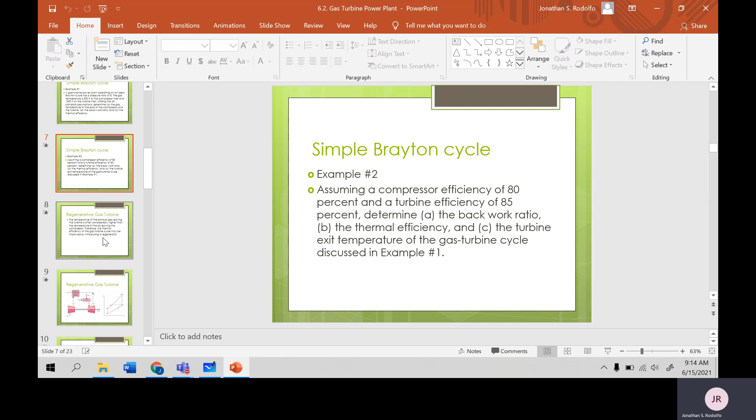Okay, so next is, okay, so let's use the slideshow. Where is it? Why is it missing? Oops, the pen is missing. Okay, let's try again. Why won't it work? Let's try to find the pen. Why is the pen not there? Wala.

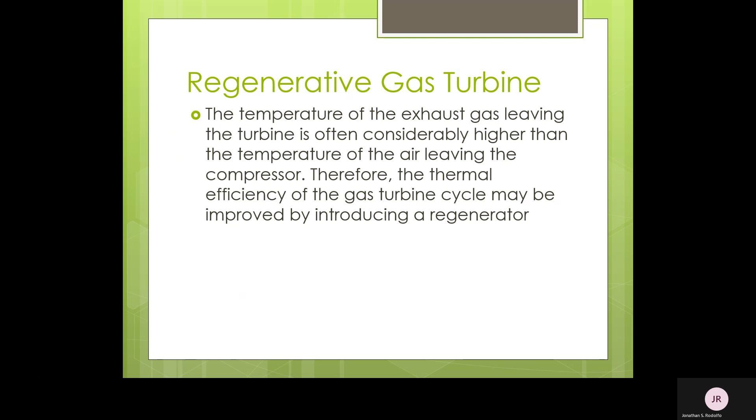Okay, let's go back. This is not the right one. So the first one, okay, this one. So, if we compare the temperature of state 4 to state 2, we observe that the temperature of state 4 is greater than state 2.

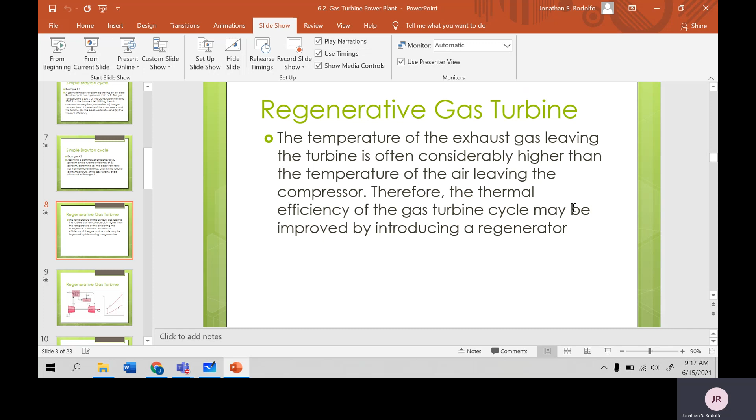Now, the energy leaving the turbine can be extracted to preheat the temperature of the air leaving the compressor. So from that, the thermal efficiency can be improved by using or introducing a regenerator.

Okay, check natin dito. So this is what I said a while ago, that the temperature of state 4 is greater than state 2. So we can use the energy of state 4, since it's greater than the energy of state 2, to be extracted to heat further state 2.

So, as we can see, from state 2 it increases to Tx, while state 4 decreases to Y. But take note that Y is still higher than state 2.

The temperature of state 2 will be equal to state Y if the effectiveness of the regenerator is 100%. So if the regenerator effectiveness is 100%, then 2 and y are equal, and then x and 4 will also be equal.

So from that, the thermal efficiency of the cycle increases because the heat input in the combustor decreases. So our heat input before is from 2 to 3, but now it's from x to 3. Same with our QR, before it's from 4 to 1, but now it's y to 1, so it decreases. Okay, let's try to solve.

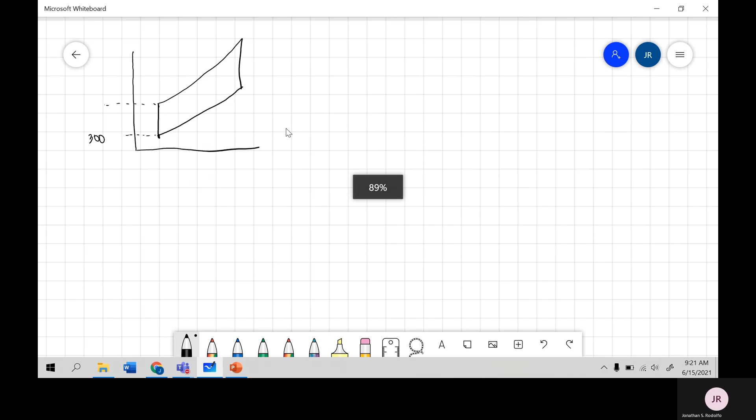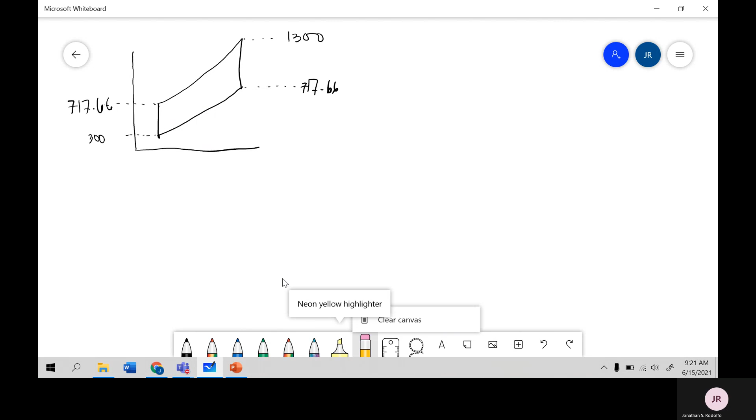This is 717.66, then this is 1,300, and then this is T4. Sorry, wrong, this should be 717.66, and this, let's delete. Ayan, 543.43.

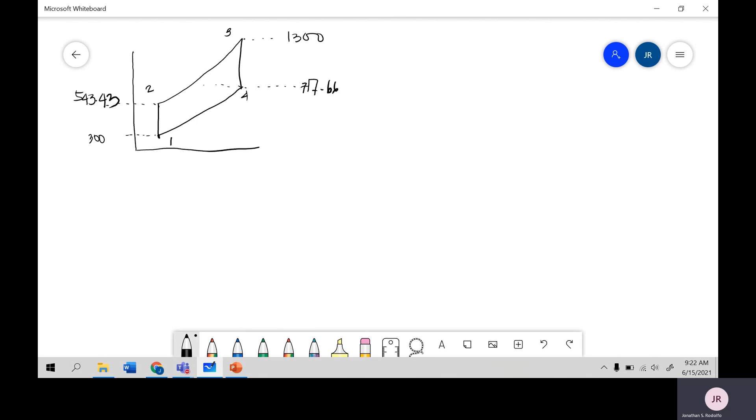Okay, let's write the states: this is 1, 2, 3, and then 4. Since the regenerator is 100%, then x and 4 are equal, so this would be x. Then 2 and y are also equal.

So, the thermal efficiency is equal to H3 minus Hx, all over H... QA. Bakit yan?

Ano nangyayari? So what should we use instead? Work of the turbine, work net, okay? Work net, since it's ideal and we have no isentropic efficiencies, so the net work would be ideal. Over QA, in terms of enthalpies this is equal to H3 minus H4, minus H2 minus H1.

Divided by... Assuming constant specific heats, cold air standard assumption, so in terms of temperature that is T3 minus T4, minus the compressor, T2 minus T1. Divided by QA, which is T3 minus Tx. Okay, so that is equal to T3, given.

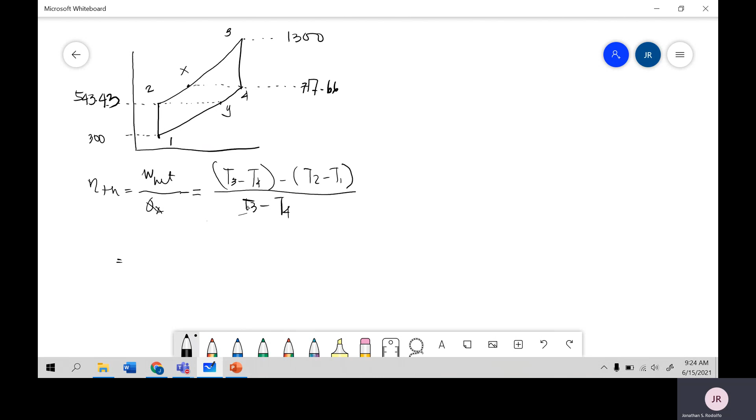This should be QA, T3 less Tx. Take note again, Tx is equal to T4, and Y is equal to T2. So maybe we can now change this to T4. Okay, we can simplify it, right? T3 less T4, yes. Maybe we can simplify it as ito is equal to 1 less T2 less T1 over T3 less T4.

So the thermal efficiency using cold air standard assumptions would be equal to 1 less T2, 543.43 less 300, over 1300 less 717.66. Okay, so it becomes 58.18%, so this is in terms of cold air assumptions.

And then using air standard assumptions, we change the thermal efficiency into H3 less H4, less H2 less H1 divided by H3 less Hx. But since the temperature of state X and state 4 are equal, we can now change this into H4. Take note class that the enthalpy of air is temperature dependent only. Unlike for steam or water, the enthalpy depends on pressure and temperature, but for air, it depends on temperature only. No matter how high or low the pressure is, it doesn't affect it.

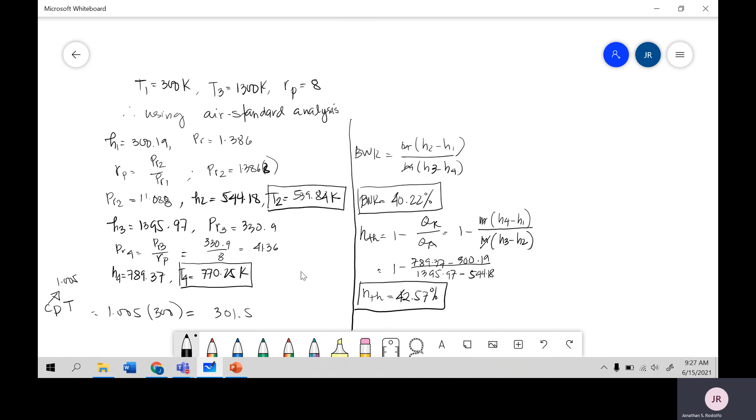So in terms of enthalpies, what are our enthalpies? Using cold air standard, let's go back. I think that is problem number 2, or solution number 2, maybe, or maybe this one, let's check. Oh yes, air standard analysis. So here, H2 is equal to, where is H2, 544.18. H4 is equal to 789.37. Okay, let's not get 1 and 3 again, we already memorized that. Alright, so go back.

Okay, so here, H3 is 1395.97 less H4 is 789.37, minus H2 is 544.18 less H1, 300.19. Okay, sorry, we can simplify this, so this is equal to 1 less H2 less H1 over H3 less H4, to make it simple.

1 less H2, this is 544.18 minus 300.19, all over 1395.97 minus 789.37. So the thermal efficiency using air standard assumption is, okay, that is 59.78%. So that's using air standard analysis.

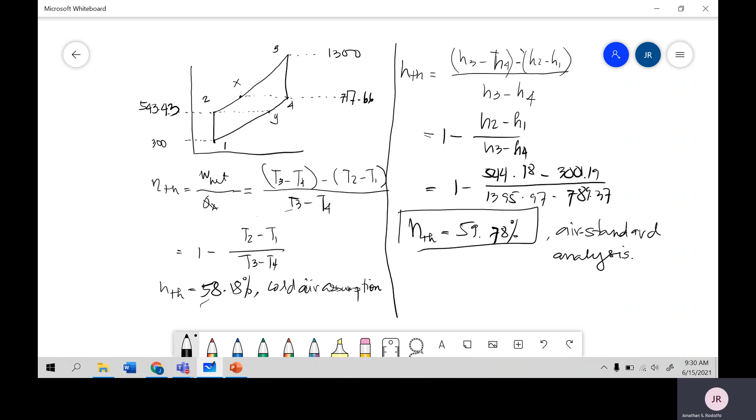Okay, next. So how about if the regenerator effectiveness is, let's say, regenerator that is equal to 80%?

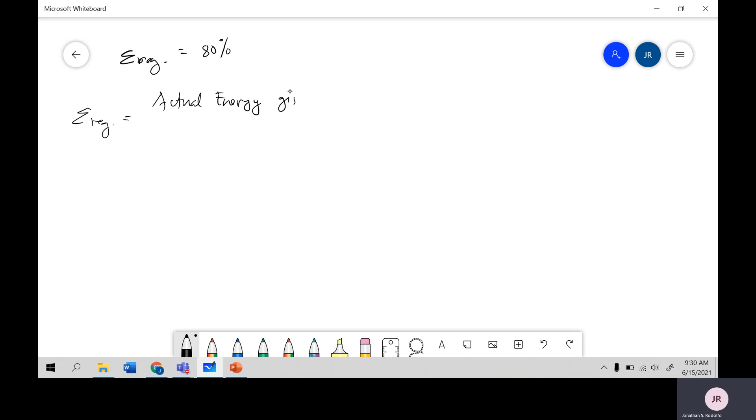Okay, so the formula for the regenerator effectiveness, that is equal to the actual energy given or extracted, divided by the maximum energy that could be given.

Okay, so going back to the figure, so the maximum energy, wait, the energy, actual is from 2 to x, then the maximum is 2 to 4, or it could also be 4 to, this. The actual energy extracted by state 2 is equal to Hx less H2, then the maximum is equal to H4 less H2. So how do we get this from the TS diagram?

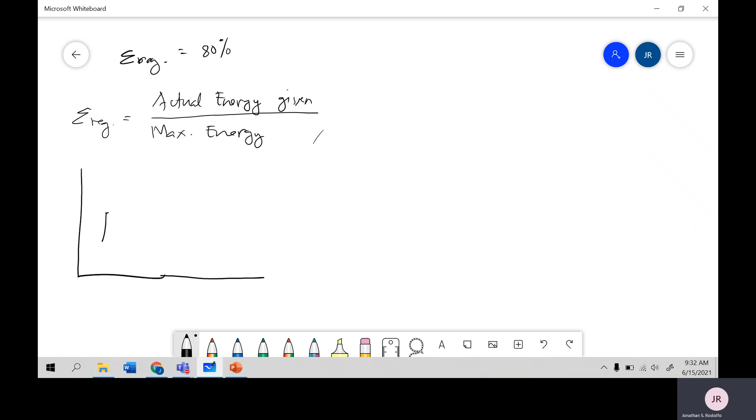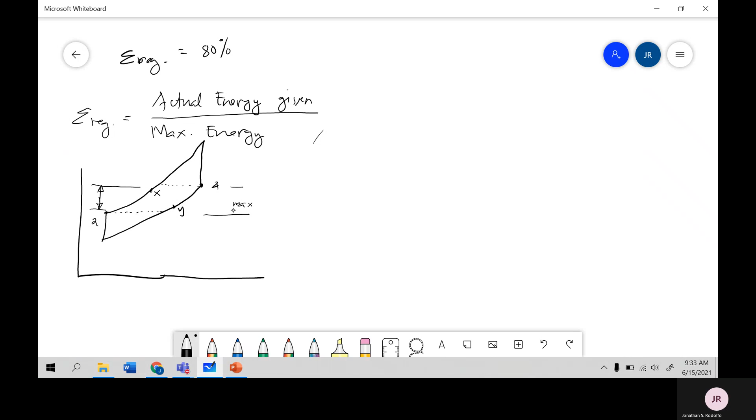This is y, no? So if you notice, y didn't reach here. That will happen when the effectiveness of the regenerator is not equal to 100%. Then our 2 is a bit lower, that's x, okay, so here is x. So the actual energy, this is the actual, yan. Then the maximum is this. So therefore, in terms of enthalpy, the regenerator effectiveness is equal to Hx less H2, divided by H4 less H2.

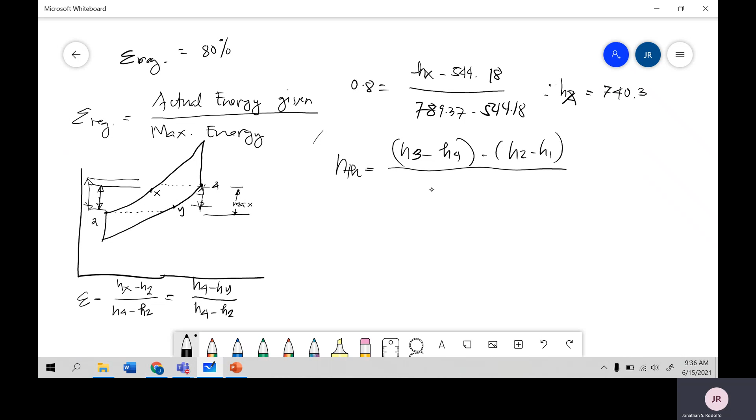So we can now solve for the thermal efficiency. That is equal to H turbine 3 less H4, minus H2 less H1, which is the work of turbine minus work of compressor. The heat added is H3 less HX now. Since we are given 3, 4, 2, then X is the enthalpy we already found. So we can now solve for the thermal efficiency.

This is equal to 55.30% for the thermal efficiency, okay?

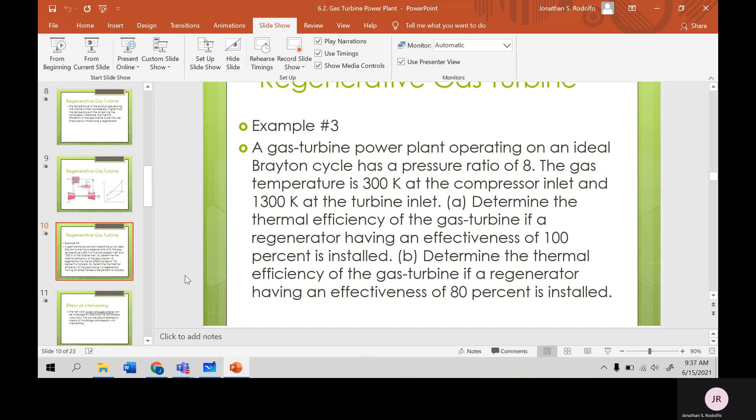So next, let's cancel that.

How about the effect of intercooling? What is intercooling?

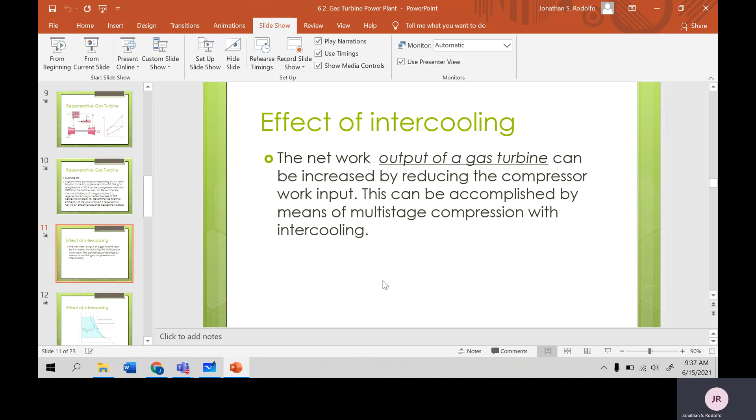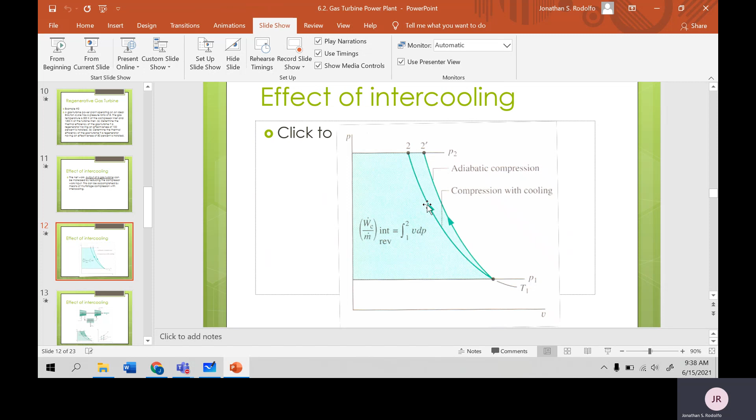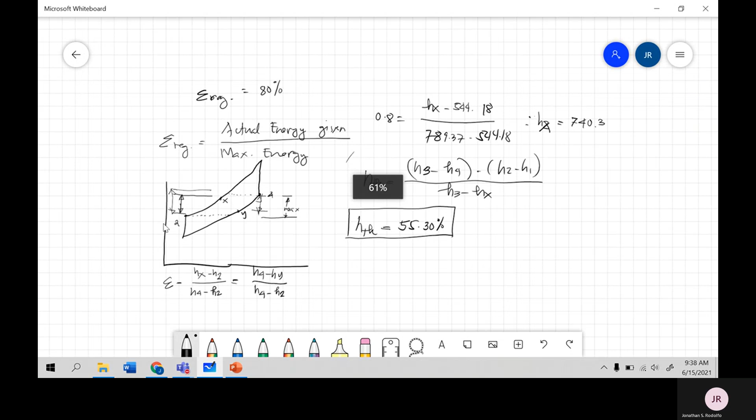So with cooling, assuming that is constant temperature. As we can see class, maybe we could draw another diagram. Let's save this one.

So assuming this is the path, from 1 to 2, this is the case where S is equal to C, or constant entropy process.

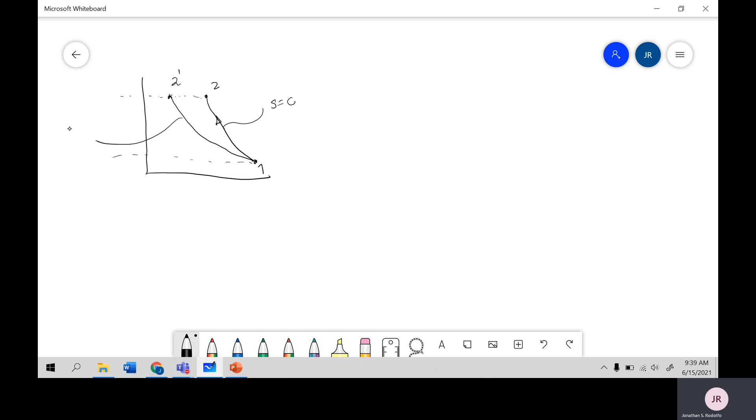Then for state 2, assuming constant pressure, we have the same inlet and outlet pressures. So assuming this is state 2 prime, this is when the process is T equal to C, constant temperature process.

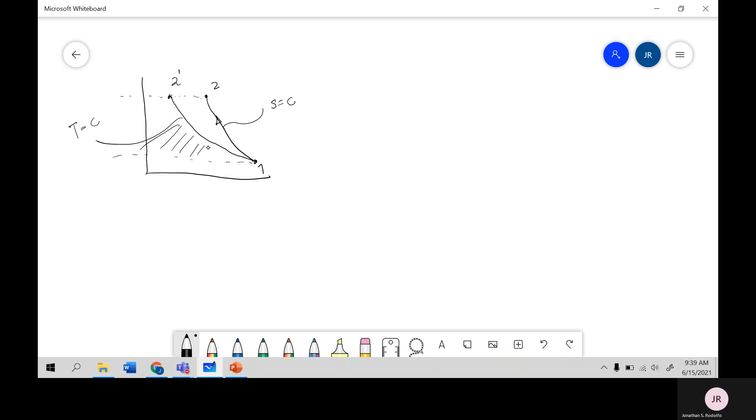So if we notice, if we get the work done by the compressor for steady flow, we know that is behind the curve. This is the area for the work done by the compressor when the process is constant temperature. And then for constant entropy, this is the area.

The area of constant entropy is larger than that of constant temperature. As a result, there is a savings in energy. This area is the saving. You save power.

When the process is constant temperature, it's better to compress the air at constant temperature process so you can save energy, so the work of compression becomes smaller. If the work of compression decreases, the thermal efficiency increases. So what if there is intercooling?

Take note, this is a PV diagram.

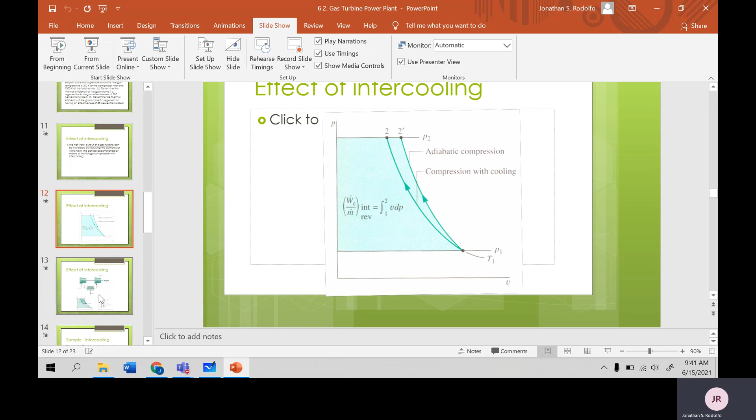Now, if there is intercooling, is there intercooling here? Yes, correct, there is intercooling. So you have a multi-stage compressor so that you have an intercooler. From 1 to 2, it compresses.

Then when it comes out, let's call it C. So state C gets cooled using the intercooler. When it cools, it goes into stage 2 compressor. So from C to D it cools.

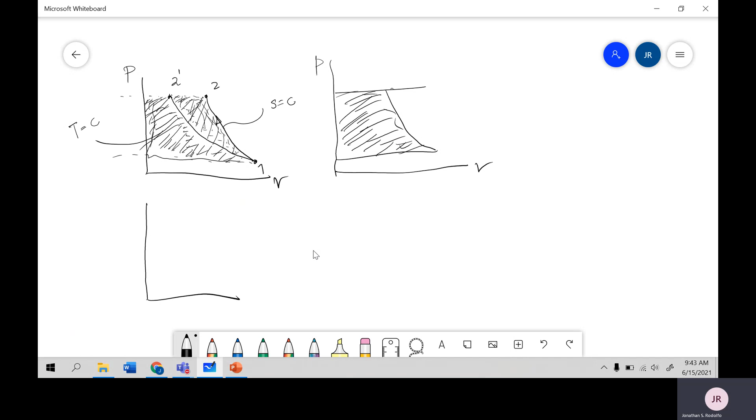While you increase the intercooling and the number of compressors, this is what will happen when there are more. If that happens, then you will approach the constant temperature line. So as they increase, the process becomes closer to constant temperature. The more, the better, but it's not advisable to have too many. At least 2, maybe 2 or 3 is enough.

But if the intercooling is 100%, or what do we call that? Intercooling.

Okay, ano bang tawag doon? Nakalimutan ko ng tawag doon. Pwede kasi yung 1 tsaka D, magkaparehas yan, no? Pwedeng magkaparehas yung 1 and D mo. Okay? Perfect intercooling pala ang tawag doon, no? Kapag yung 1 tsaka D, nagkaparehas na.

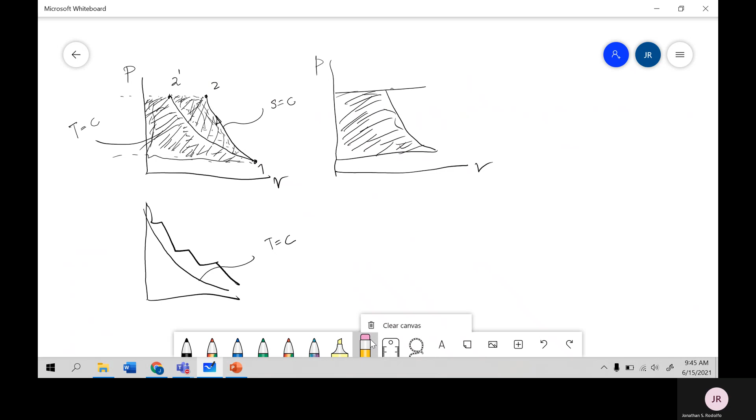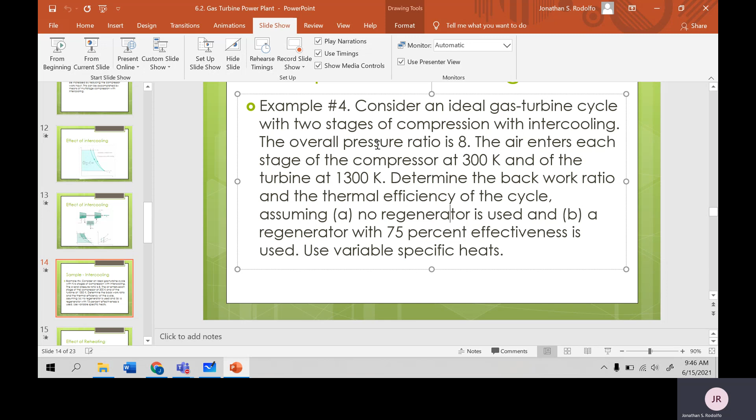Okay, so let us draw the, wala palang sinabi kung ano yung intercooling dito. So walang sinabi, with intercooling lang. Okay, so if that happens, walang sinabi kung ano yung exit temperature, or yung entering temperature, ano to? C, no? C. So since walang D pala, no? Since walang sinabi kung ano yung temperature ng D, okay, so assume that that is perfect intercooling. So draw natin yung TS diagram para mas magets.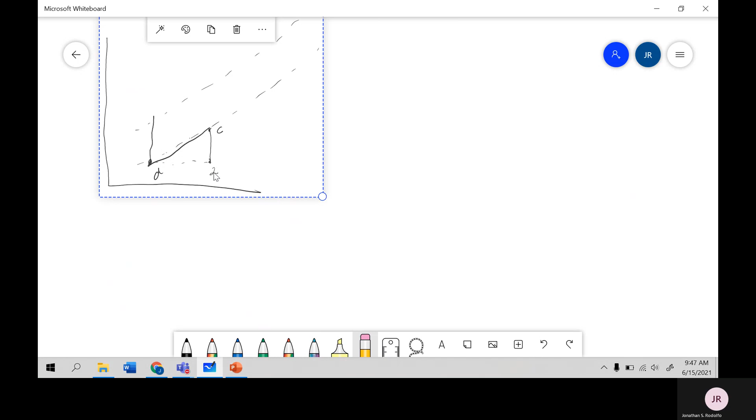TS diagram, so 1, yung pressure lines lang muna. Pressure lines, constant pressure lines. Okay, 1. And then ito naman si C, no? So si C, lumamig, assuming perfect intercooling, so magkapantay si C tsaka si D. Oh, and then from C, from D, naging, bakit 1? It should be 2, 1. Yung ito lang i-delete ko. Ngayon ma-delete, kanya lahat. Ayan muna, alisin na lang natin. 1, and then this is 2, no? And then okay.

3, and then 4. Okay, so for the meantime, yan muna yung TS diagram. So baguhin natin mamaya, depende sa mga masasolve natin.

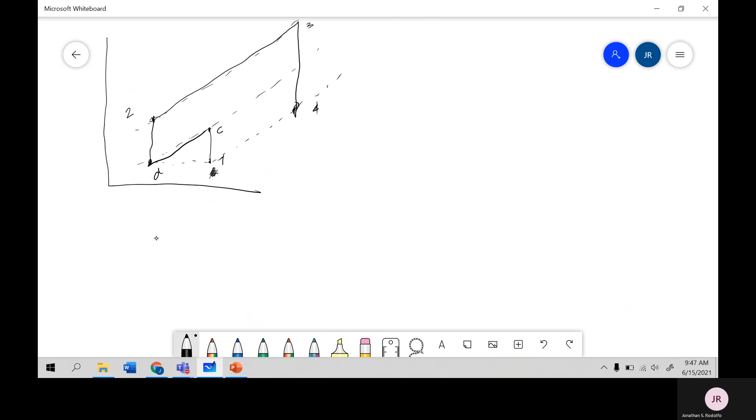Okay, sige, so overall pressure ratio daw is equal to 8. So that means that is RP, that is equal to 8, or that is equal to P max over P minimum. So this is equal to P2, no? P2 over P1. Okay, how about the intermediate pressure? Yung sinasabi na intermediate pressure, that is the pressure between these two lines, no? Ito. Ano yung pressure dito? Yan. Okay.

Pressure at D at saka C. Para makuha yun, yung intermediate pressure, usually ang kwan doon is, tama ba? RP x. Intermediate pressure, CD na lang, C tsaka D, that is equal to the square root ng ito, RP total. So ano ba yan? Square root of 8. Ano ba ang square root of 8? 2 square root of 2. So assuming that P1 is equal to 100 and then P2 is equal to 800, then therefore the formula would become, para makuha natin yung PC tsaka PD, that is equal to square root ng 100 times 800, or that is equal to square root ng P1 times P2. Ganun lang siya, no? Intermediate pressure. Okay? So hindi naman natin kailangan yan.

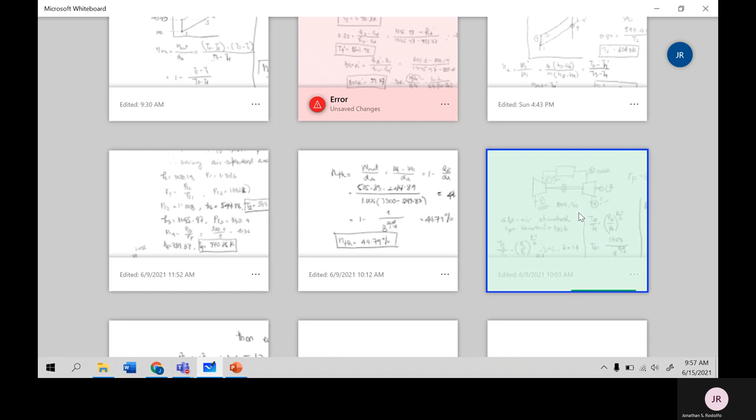Okay, so how about the work of the compressor versus the turbine? Work of the turbine is... there, 585.83. So that's what we'll put, 585.83.

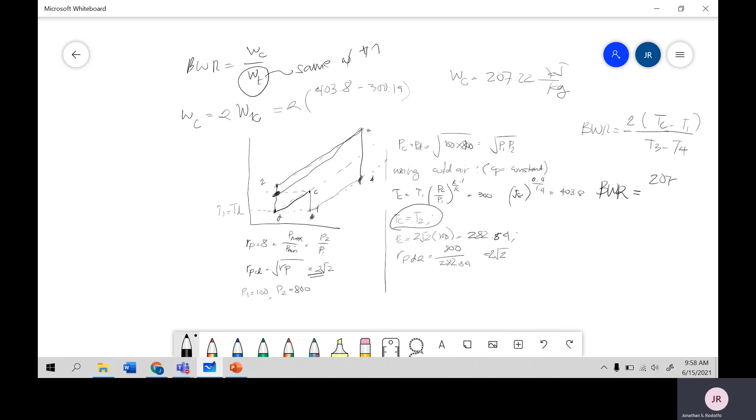Wait, that's backwards. T3 less T4, backwards. This should be it. 2 times TC less T1 over T3 less T4. So that's 207.22, and then I forgot.

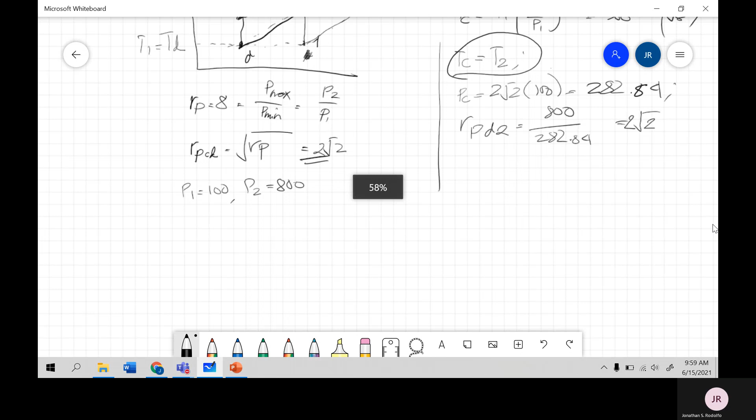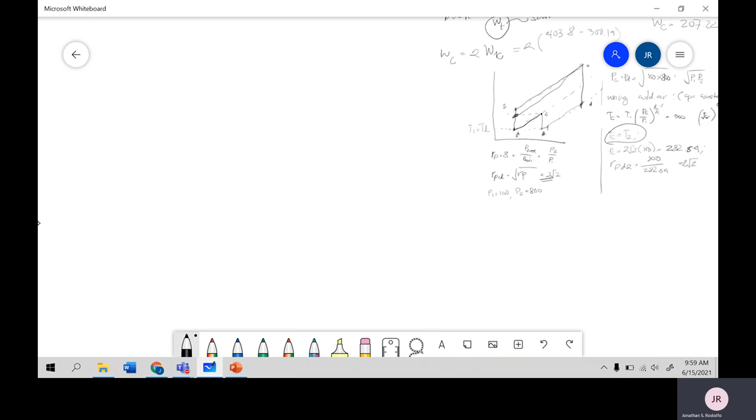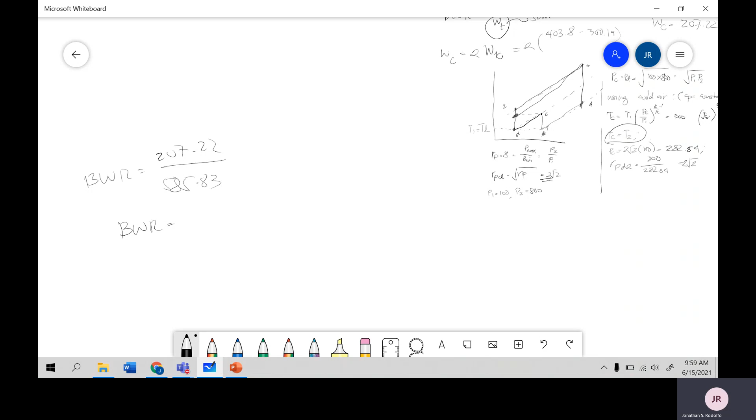Let's go back to it. 585.83. How do you do it? This one, so back work ratio is equal to 207.22 over 585.83. So the back work ratio is equal to 35.37%.

Okay, so that's what happens, so the back work ratio became smaller compared to sample number 1. How about the thermal efficiency? Thermal efficiency is work net over QA. Our work net here is work of the turbine, 585.83, minus work of the compressor, 207.22. How about QA? Well, our QA became bigger.

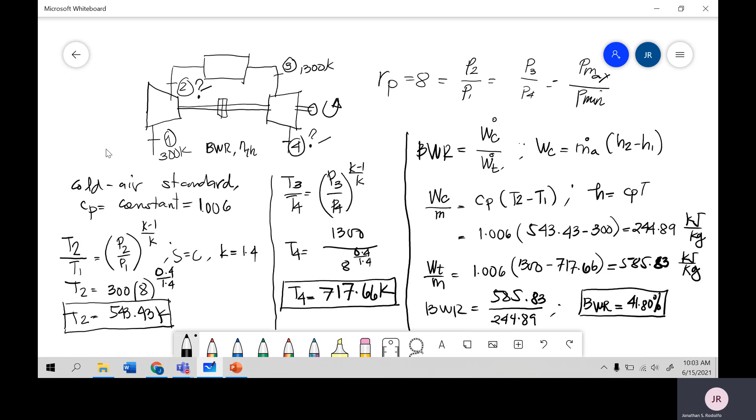So what should you do to decrease this, to increase the thermal efficiency? What should you do?

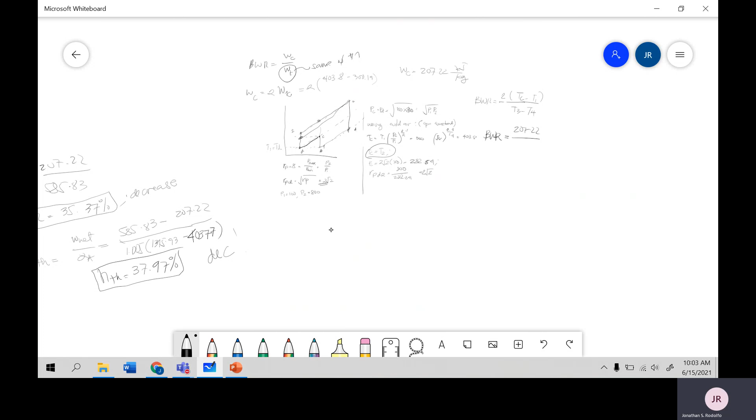So let's draw again the TS diagram, let's just correct it. Like this. Okay. This is 1, this is C. This is D, and then 2. They should be the same, 2. Okay. 3, and then 4. It's getting too long. So 4 is higher.

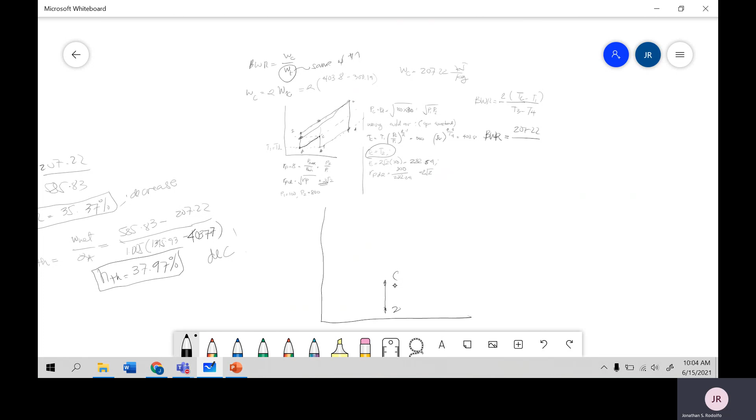It's becoming messy. One, and then C. And then, this is D. This is 2. Okay, like this instead, so it's faster. And then 4 is higher. 4, 3. There. Okay, so 4 is higher than 2. Okay, right. So that's the TS diagram.

Okay, so that's all for the gas turbine power plant. Then you will have an assignment, or maybe a quiz for this. So, that's it. Okay.